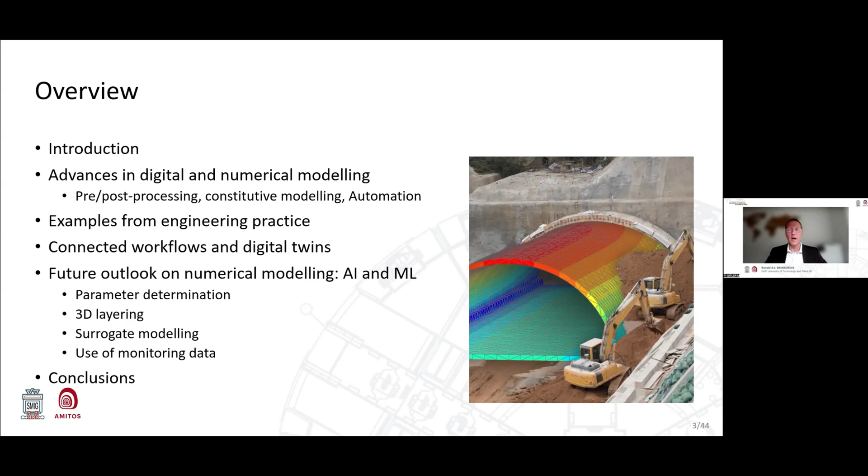In the Netherlands, much research related to the practical construction of bored tunnels in soft soils has been performed in the 90s of the previous century. As a result, the first TBM tunnel in the Netherlands, the second Heinenoord tunnel, opened in 1999. Since then, more than 10 bored tunnels were constructed. The most recent TBM tunnel is the Corbulo tunnel in the Rijnland route near Leiden, which opened last year. For all these tunnels, numerical modeling has been performed as part of the design process.

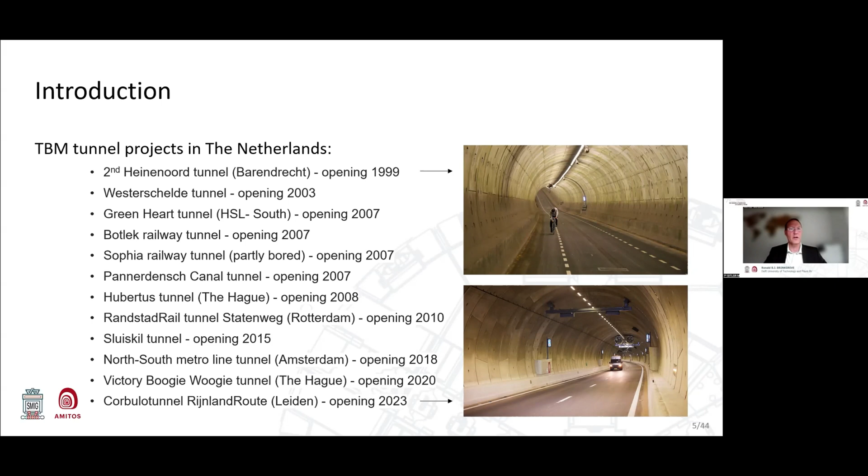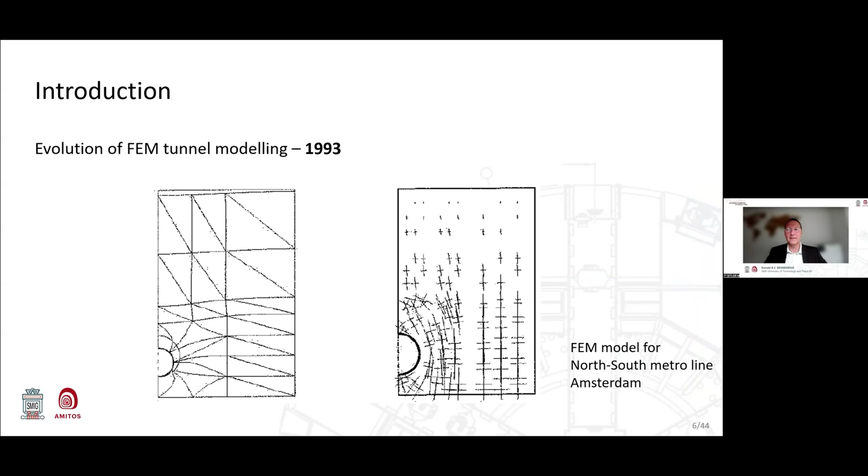In preparation of this presentation, I dived into the history of numerical modeling of tunnels and shafts in practical applications and found this example from 1993. The picture shows a finite element model for the construction of the TBM tunnel for the North-South Metro line in Amsterdam. This involves a 2D plane strain finite element model composed of a limited number of 15-node triangular elements. The volume loss due to TBM tunneling was simulated using contraction of the tunnel lining, as Angelo already mentioned. The right-hand plot shows the rotated principal stresses in the ground, indicating arching around the tunnel.

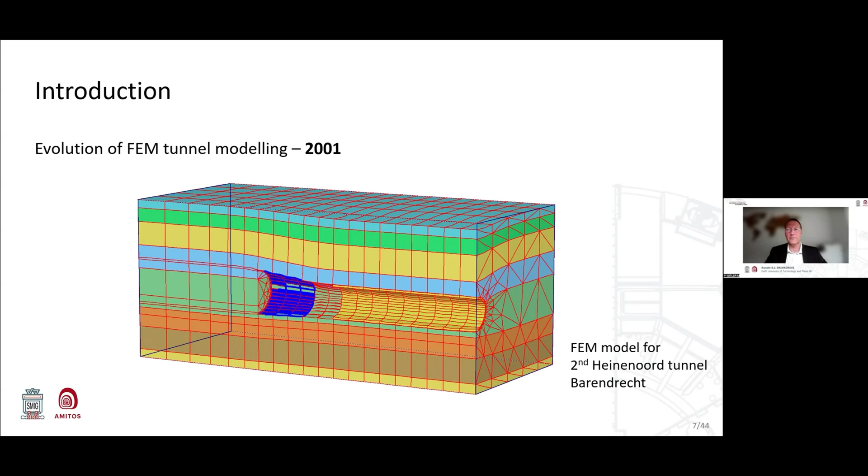8 years later, it was already practically possible to model TBM tunnel construction using a 3D finite element model. The model shown here was created for back analysis of the second Heinenoord tunnel near Barendrecht. The deformation around the tunnel was modeled using a combination of 3D lining contraction and grout pressure modeling, followed by the installation of the final tunnel lining. You can see how a settlement trough is formed and how every advancement step contributes to the surface settlements.

Fast forward to 2017, when 3D finite element modeling of tunnels and shafts and the interaction with surrounding structures in an urban environment has become quite feasible and common practice. The model shows a tunnel with reinforcements constructed according to the sequential excavation method and its influence on the surrounding structure.

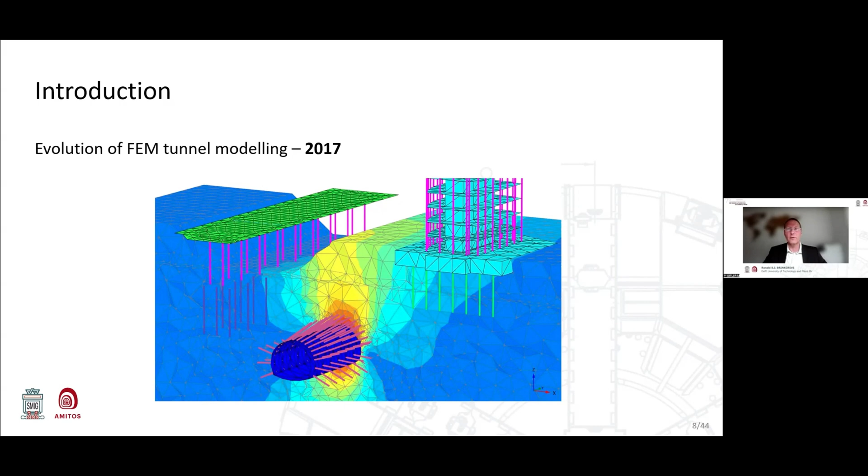BIM was introduced, offering new capabilities for integrated digital workflows. Now, in 2024, the new paradigm is digital twins. A digital twin is a digital copy of a project or asset, such as a tunnel or any kind of infrastructure. It makes all related information securely available for all stakeholders involved.

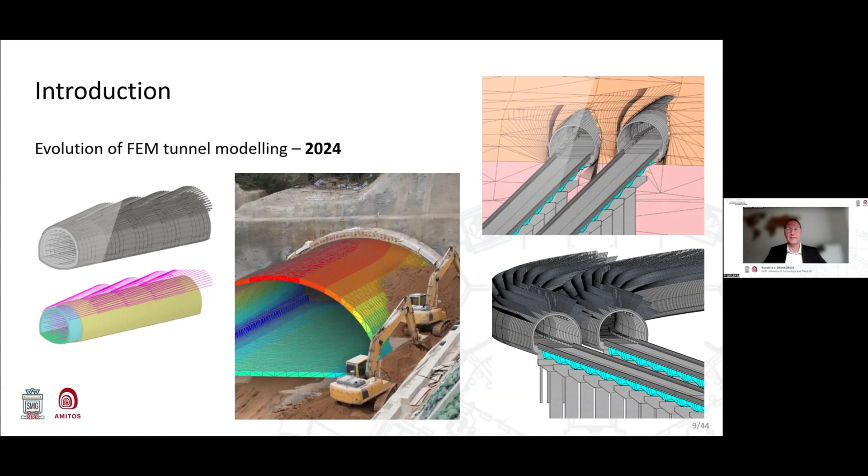A digital twin does not only cover the entire construction process, from preliminary design to project delivery, it also facilitates operation, maintenance, and retrofit all the way until the end of lifetime. 3D numerical modeling and finite element analysis as part of the design process can be fully integrated in a digital twin environment. Over to some advances in digital and numerical modeling.

Looking at the development of finite element modeling capabilities over the last decades, they can be categorized into geometric modeling, constitutive modeling, structural elements, post-processing, and automation. I will subsequently demonstrate some of these developments, such as a tunnel designer for creating tunnel geometries, constitutive models for soil, rock, and shotcrete, special elements for anchors, rock bolts, forepoles, and cables, and I will mention tools for post-processing and automation. In particular, the programming language Python, with all its available libraries, has proven to be extremely useful in automation.

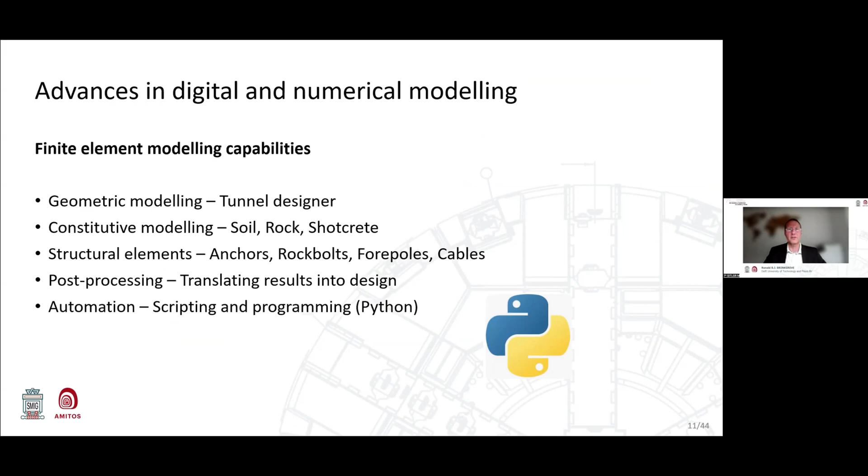The import of CAD models of tunnel contours for numerical analysis is often problematic, since CAD models may provide inconsistent geometries. The use of a tunnel designer in the finite element software is not only useful to create a consistent tunnel geometry, it also facilitates the generation of structural components as well as the installation phases. In this way, a consistent numerical model can be created that allows for a realistic simulation of the tunnel construction process, both for TBM type of tunnels as well as for tunnels following the sequential excavation.

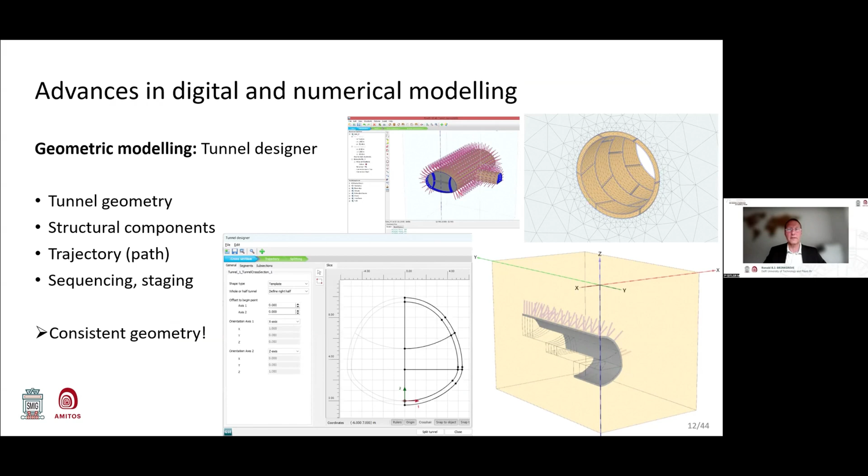Significant advances have also been achieved in terms of constitutive models for soils and rocks. Besides the well-known modified Cam-clay model and hardening soil model with small strain stiffness, more advanced models are nowadays available that incorporate specific features of soil and rock behavior. Such features may include anisotropy, strain softening, unsaturated soil behavior, swelling, and creep. Note that strain softening behavior requires the use of a so-called regularization technique to reduce the inherent mesh dependency that would otherwise make the results unreliable.

A special rock modeling feature is a discrete fracture network generator. This is not a constitutive model, but a tool to generate discontinuity elements with a separate failure criterion in the finite element mesh based on a stochastic distribution of fracture orientation and sizes. One of my TU Delft students, Vasilios Scordilis, created his own 2D DFN generator and investigated different failure criteria for discontinuity elements.

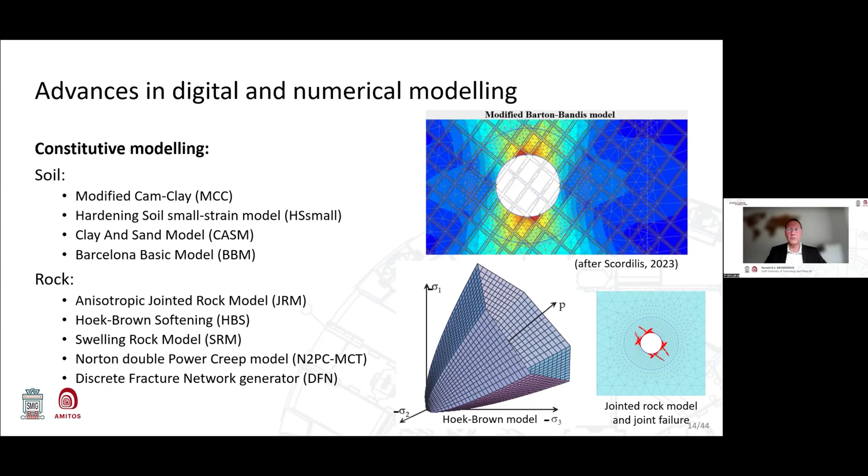Unfortunately, there is no time to go into the details of all these models, but more information is available in the various publications from researchers in our group. Some references are given at the end of this presentation.

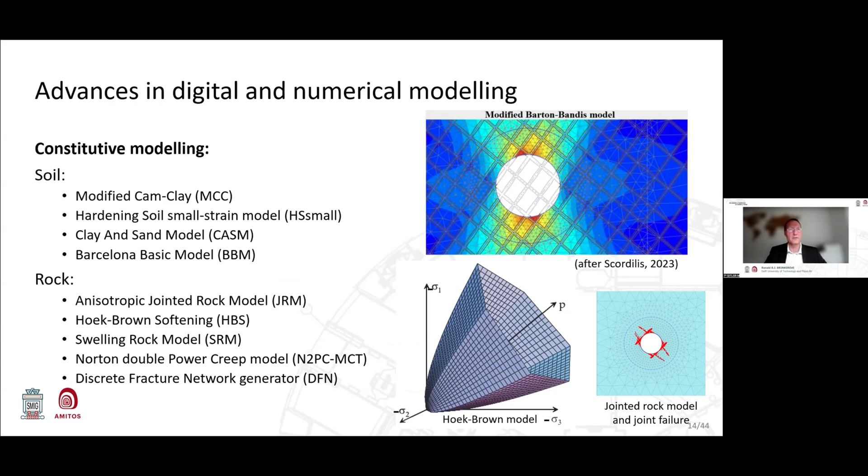A special constitutive model has been developed for shotcrete. This model deals with the hardening of the fresh shotcrete on the short term, as well as the nonlinear stiffness and strength properties in compression and tension on the longer term, including strain softening and creep. The use of such an advanced model may be beneficial in the design process. Its nonlinearity will generally result in lower stress concentrations, and as a result, less reinforcement is needed in the design of a tunnel lining than what would otherwise be needed when using a simpler model.

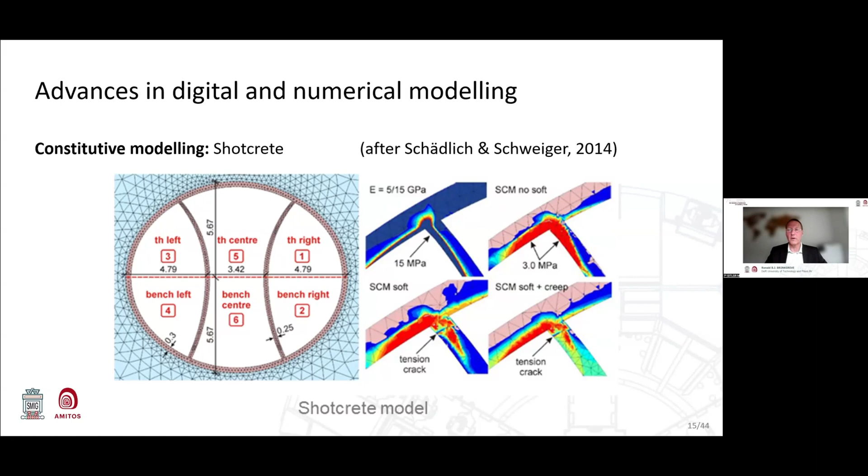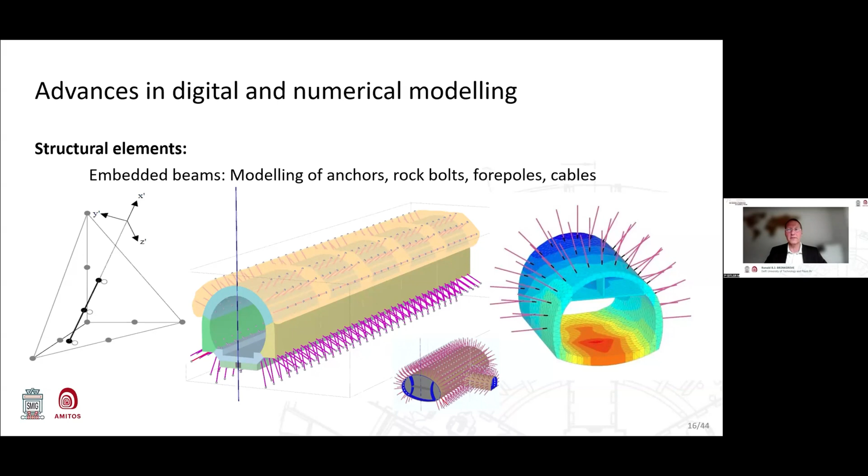Structural elements have been developed to account for various types of anchors, rock bolts, forepoles, and cables in the numerical model. These elements make use of the embedded beam concept, where a line element can arbitrarily cross a continuum element representing the surrounding soil or rock. Apart from its structural properties, the line element also incorporates a special type of interface that accounts for a realistic interaction and bonding with the surrounding soil or rock. These structural elements can be conveniently and consistently incorporated in the numerical model via the tunnel designer.

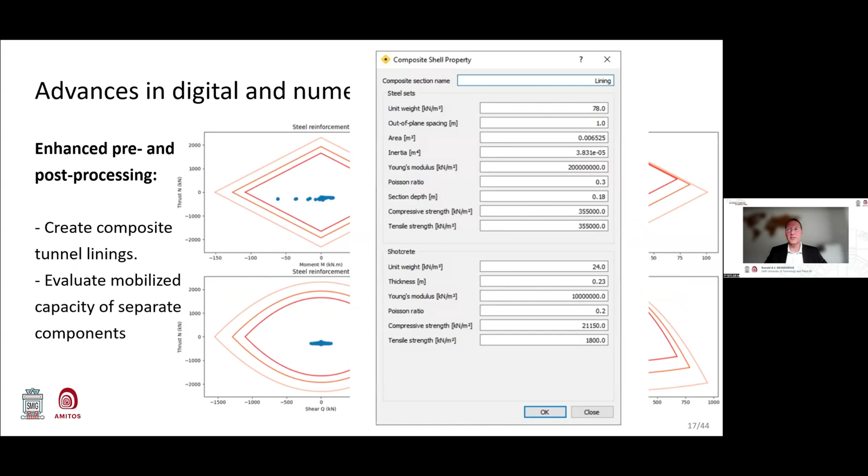Shotcrete tunnel linings are generally reinforced by steel bars or meshes. The combination of both is typically modeled as a composite shell in a finite element model. The equivalent shell properties can be calculated with help of a pre-processing tool, while the mobilized capacity of the separate components can be assessed using an enhanced post-processing tool. The resulting picture shows where the actual combination of structural forces of the shotcrete and the steel reinforcement lies within the corresponding capacity diagrams.

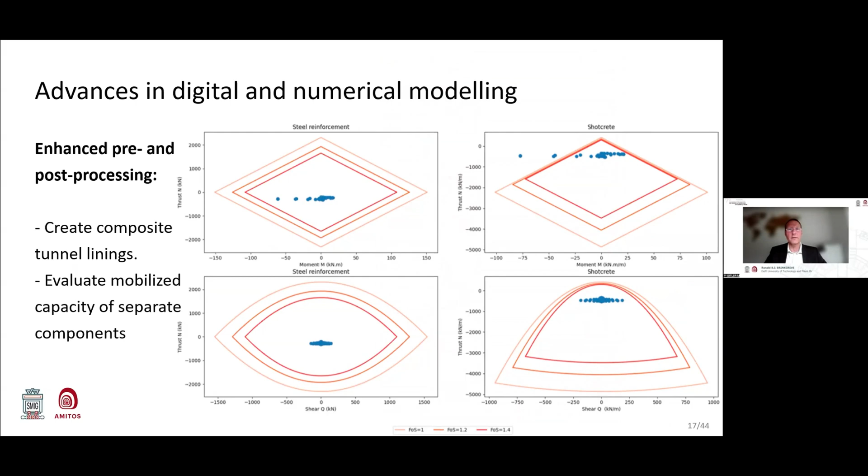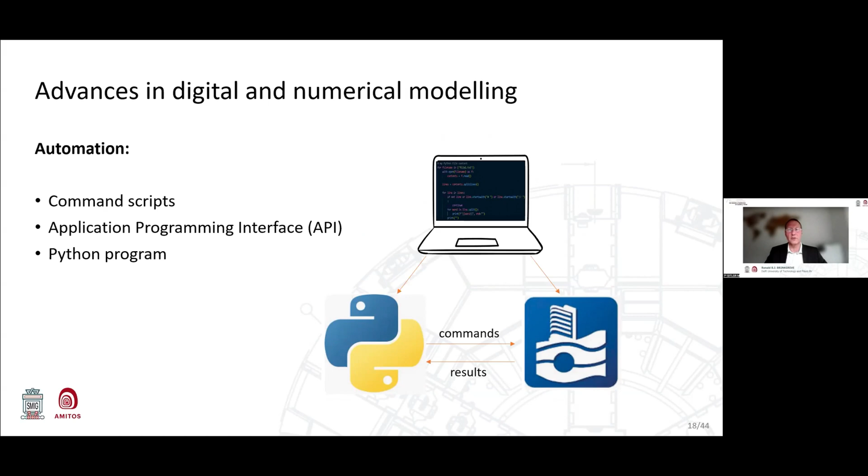Automation helps make the numerical modeling process efficient and less error-prone. Modern finite element software works with a command line interface that allows predefined command scripts to be executed. The executed commands are logged, and the logs can serve for quality control purposes. An application programming interface, or API, allows external software to interact with the numerical model. An external Python program can be written to send commands and extract results, thereby controlling the entire modeling and calculation process.

The API does not only make the model creation more efficient, it also provides numerous possibilities for automated processes that would otherwise cost an immense amount of handling time from the user. Examples of such automated processes are parametric studies, sensitivity analysis, design optimization, probabilistic analysis, and the modeling of heterogeneity by means of random fields.

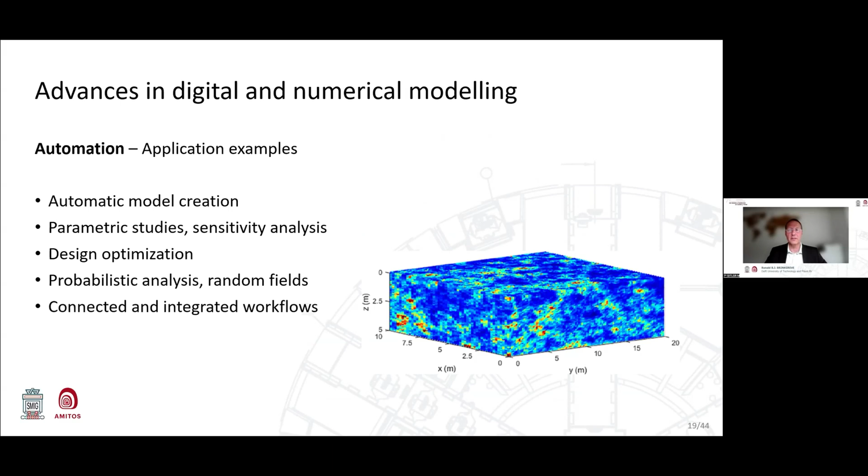And last but not least, it allows for connected and integrated workflows and the exchange of data within a digital environment, such as in BIM and digital twins. I will come back on this in a few moments.

Now I will show two examples from engineering practice where numerical modeling is used to facilitate and optimize the tunnel design and construction process. The first example is a 3D back analysis of in-situ measurements for the South Toulon Tunnel in France. The full-face excavation involves various types of reinforcement to ensure the tunnel stability in the difficult heterogeneous ground conditions. The reinforcement strategy was adapted and optimized based on the measurement data.

The measurements were also used to validate the numerical back analysis model, which was used to gain more insight in the complex soil structure interaction behavior around the tunnel and its reinforcements. The graphs show the 3D settlement profile in longitudinal direction and in a cross-section in comparison with the measurements.

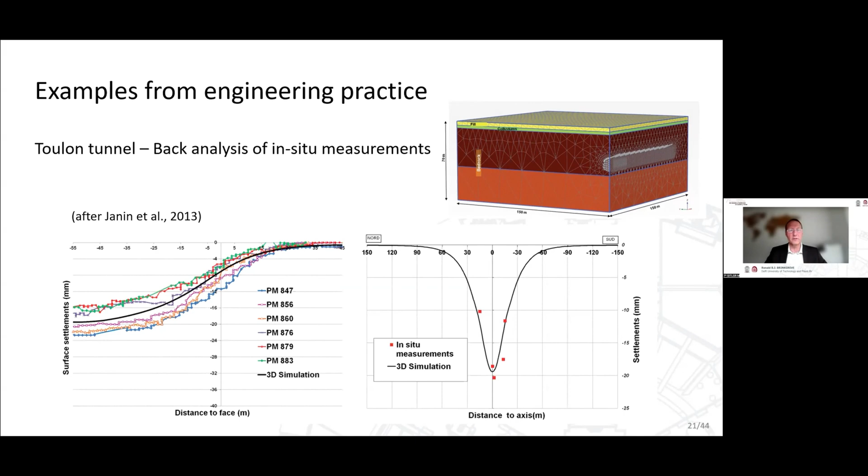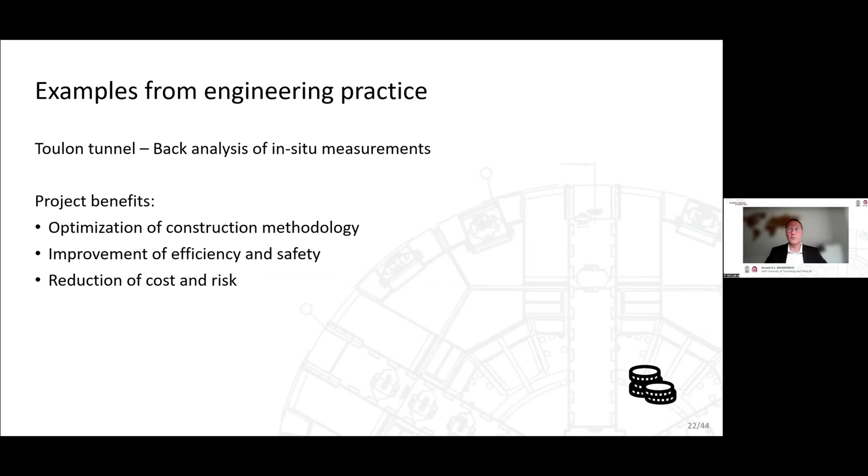The numerical back analysis provided the following benefits to the project. It led to an optimization of the construction methodology, in particular with respect to the placement of reinforcement elements. It gave an improvement of the efficiency of the project, as well as the stability and safety during construction. Overall, it led to a reduction of project costs and risk.

The second example is the automated analysis of a segmented precast concrete tunnel lining, or PCTL, using Python scripting. As can be seen from the pictures, not only the geometry of a PCTL tunnel is difficult to create in a finite element model, also the interaction properties between the lining sections require special attention. Manual model creation would lead to a tedious and error-prone process.

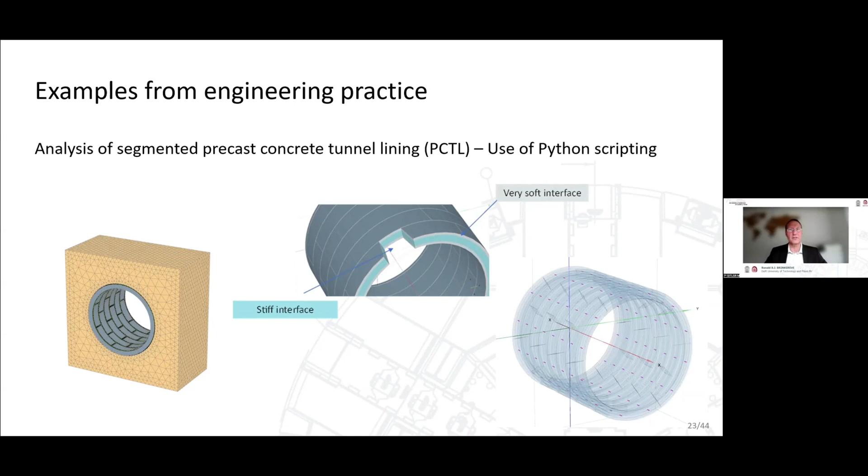A generalized and parameterized Python script was developed for the modeling of PCTL tunnel linings in the engineering practice. The script can be used to automatically create or generate tunnel geometries, segment interactions, loading conditions, and construction sequences for numerical analysis.

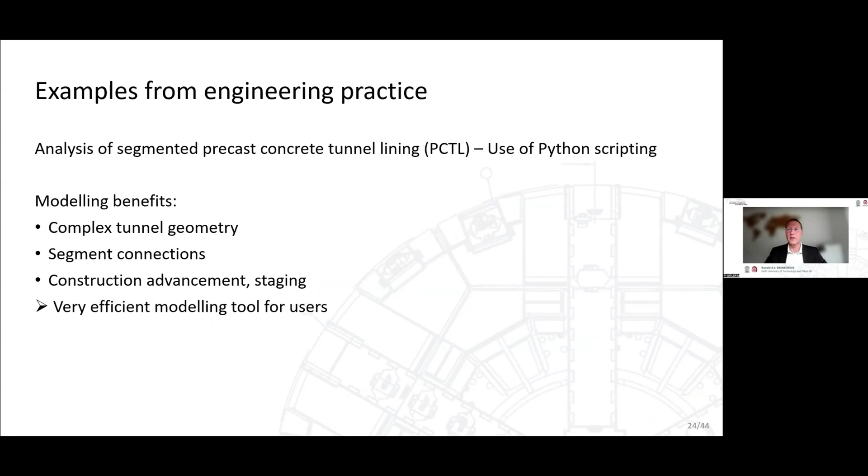The benefits of the Python script are multiple. It automatically generates complex tunnel geometries. It deals with the complex segment connections and their interaction properties without introducing modeling errors. It also handles the tunnel advancement and translates this into construction stages or calculation phases. Overall, it is a very efficient modeling tool for PCTL tunnels available for practical users.

As promised, I will now take a moment to talk about connected workflows and digital twins. Data plays an important role in any project. Connected workflows and digital twins are centered around data, typically stored in the cloud. A digital twin exists by the interoperability and exchange of data between different software packages. It is essential that the data is kept up to date as a single source of truth, such that all processes and results depending on these data are also kept up to date.

Within a digital twin, geotechnical and geological data can be interpreted and processed into soil and rock strata and parameters. These data can be passed onto geological modeling software to create a 3D subsurface model. Sections from the subsurface model, together with structural data and components, can be further processed to create geotechnical and structural analysis models for performing design calculations. Results from these calculations can also be stored in the system.

Moreover, sensor data and real-time observations stored in the system can be used for monitoring, back analysis, and optimization. All up-to-date information is presented in a structured and meaningful way for project management and decision-making purposes, and securely made available for any stakeholder in the project.

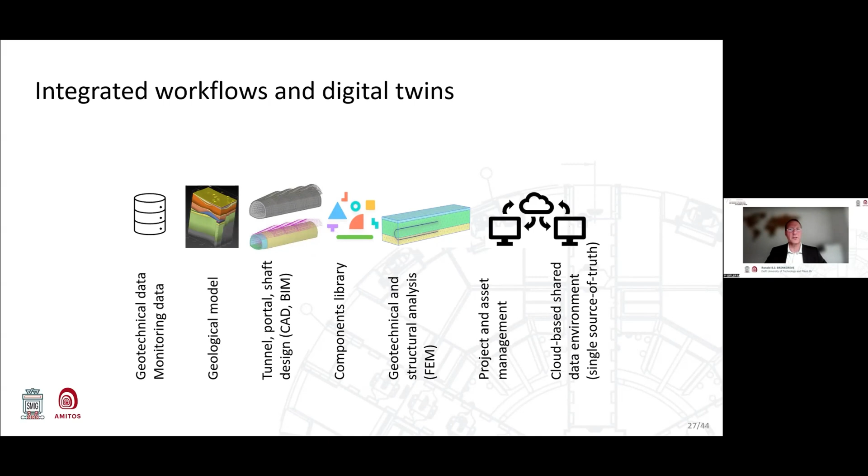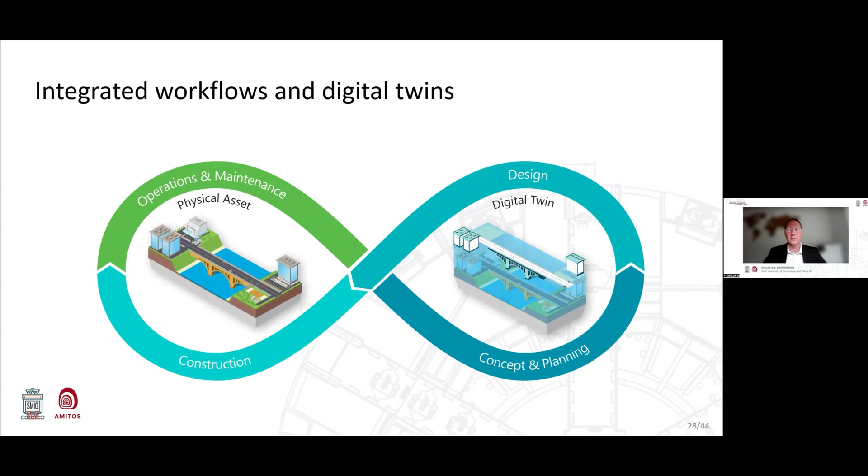As mentioned, a digital twin does not only cover the design and construction process, it also captures the continuously evolving state of a project from its concept and planning to design and construction, and following digital modeling and automation, it's clear that integrated twins are ready for the next step in tunneling and infrastructure projects. Now it is up to the industry to adopt digital twins and benefit from the connected workflow and instantly available project data, not only in new projects, but also for existing tunnels and other infrastructure.

The remaining part of my presentation gives an outlook on the numerical modeling of tunnels and shafts in a data-driven environment in which artificial intelligence and machine learning will play a major role. As mentioned, data and up-to-date information is essential in any project.

For tunneling projects, this may involve geometric and location data, ground data, structural data, materials and properties, including soil, rock, structural properties, measurement data from sensors and observations, elaborated data resulting from the interpretation of raw data and from the design process.

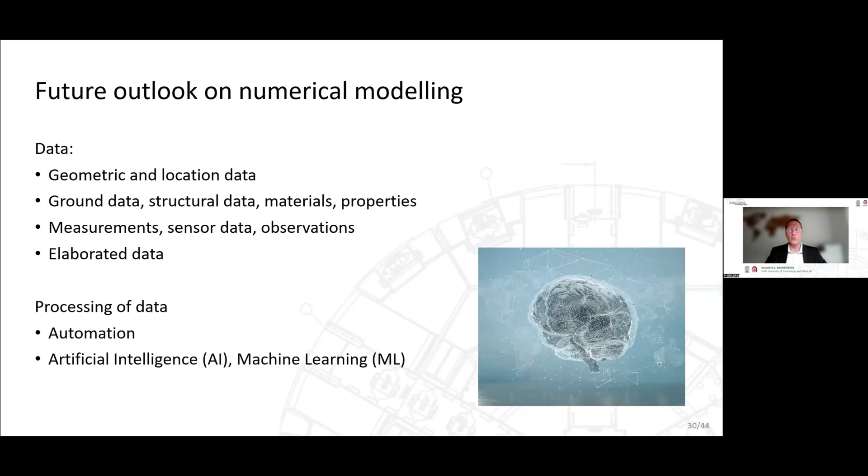The numerical modeling of tunnels and shafts needs such data and may benefit from a further enhancement of these data. Automation, as well as artificial intelligence and machine learning, may help to efficiently process these data and facilitate numerical modeling. In the following slides, I will demonstrate some concrete examples using AI and ML in numerical modeling.

A first example where AI and ML can help numerical modeling is in parameter determination. We have developed a method for automated parameter determination, or APD, from cone penetration tests and other field tests in soil based on the graph method. The graph method is a form of artificial intelligence. It is used to create paths of correlations all the way from the core CPT parameters via intermediate soil properties to the final soil and model parameters.

To determine all model parameters of the hardening soil small strain model requires a more extensive graph, but in principle, the whole parameter determination process is still transparent and verifiable. Users can follow how parameter values propagate through the system. Alternatively, an artificial neural network could be trained on the input and output parameters to provide model parameters for other cases. However, in this way, the parameter determination process is not transparent anymore and becomes a black box.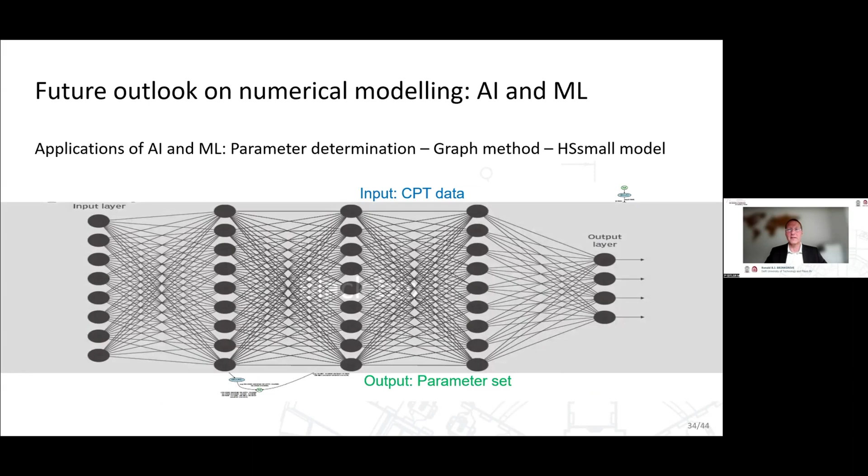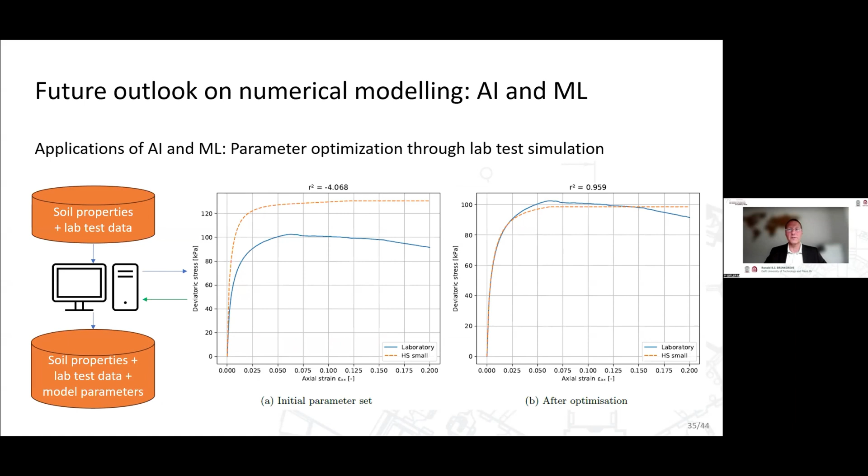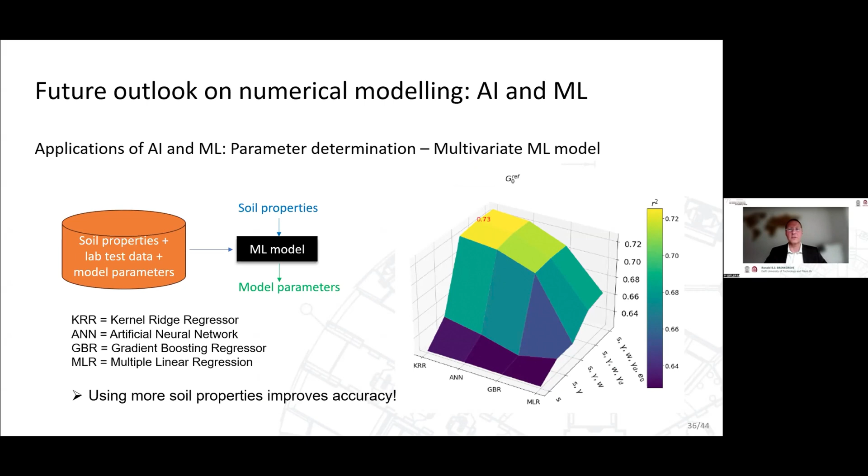In this way, the existing database was extended with optimized model parameters for the hardening soil small strain. He then used the extended database to see if a machine learning regression model could be trained to predict the model parameters directly from the basic soil properties. The diagram shows that using more soil properties improves accuracy, although the results are not perfect. The kernel-ridge regression algorithm gives the best results in this case. Together with the automated parameter determination from field test data, as mentioned earlier, this could help overcome the lack of lab test data that is usual in an early stage of a project.

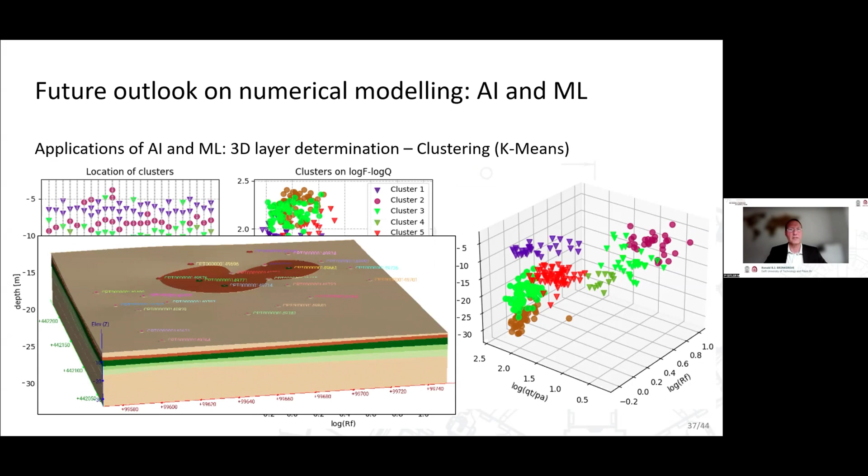The third example of machine learning is surrogate modeling. A surrogate model is a data-driven model rather than physics-based that can provide instant results for a situation that can be described by a set of input parameters. A multivariate machine learning classification or regression model is trained on specific outcomes from different sources, such as field observations, but also more time-consuming numerical analysis can be performed to prepare the training data.

It can replace numerical analysis in case multiple evaluations are required, for example, in parametric studies, design optimization, or probabilistic analysis. So far, surrogate modeling has been applied to relatively simple geotechnical problems, such as bearing capacity of foundations, stability of slopes and embankments, and deformation and forces in soil retaining structures, with variations in soil properties, geometry, and load configurations.

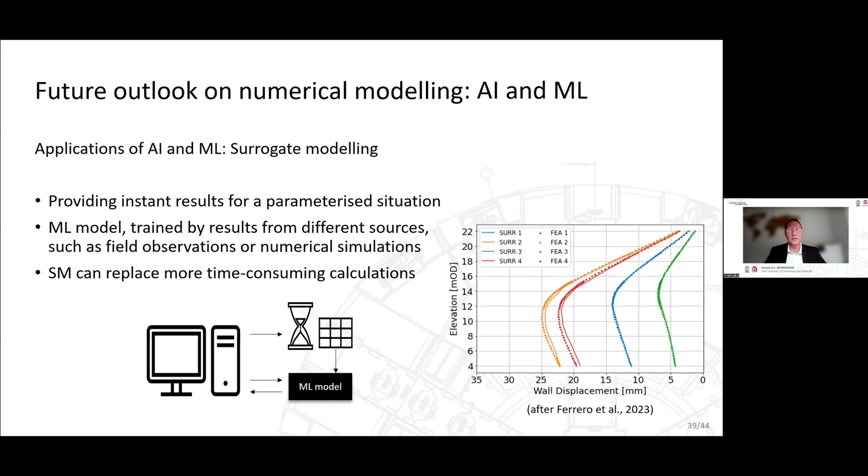The last example where AI and machine learning can be used is in conjunction with monitoring data, such as obtained from the observational method. AI and ML embedded in a cloud-based digital twin ecosystem can provide great opportunities to integrate the continuous flow of monitoring data with instant modeling capabilities into monitoring dashboards. This also enables the creation of early warning systems and decision support systems, allowing operators to take immediate action in case predefined values are exceeded or undesired scenarios are unfolding.

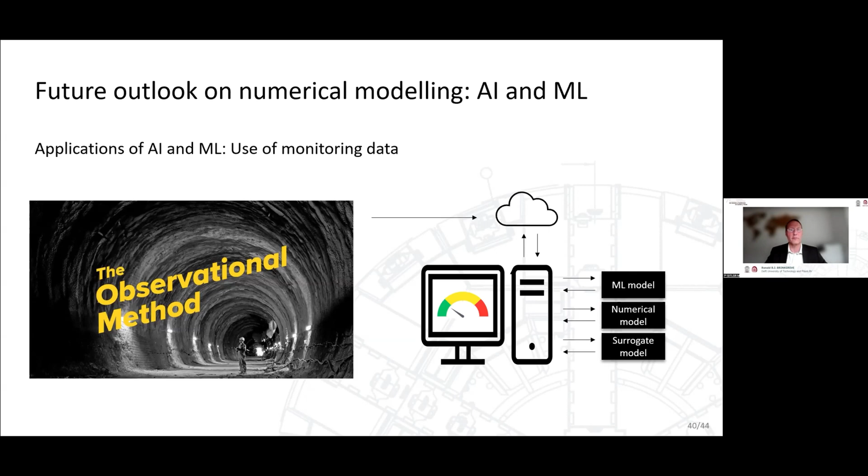That brings me to the conclusions of this presentation. Numerical modeling of tunnels and shafts has significantly advanced over the last decades. I have shown some examples of geometric modeling, constitutive modeling, structural elements, and automation that are available nowadays for efficient model creation and realistic simulation of practical tunneling projects.

We also see that data has and will become more and more important. Numerical modeling integrates with data and other software applications into a cloud-based digital twin environment. A digital twin provides a seamless flow of data across all applications and secured access to a single source of truth for all stakeholders involved in a project.

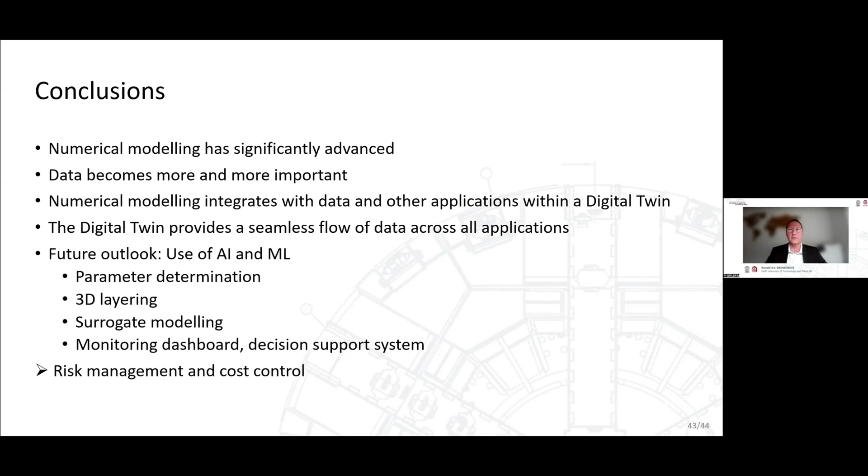In the second part of my presentation, an outlook was given into the future. I have subsequently shown the use of AI and ML in parameter determination, 3D layering, surrogate modeling, and the use of monitoring data. AI and ML provide analysis opportunities that would otherwise be very time-consuming, such as parametric studies, design optimization, probabilistic analysis, and real-time back analysis.

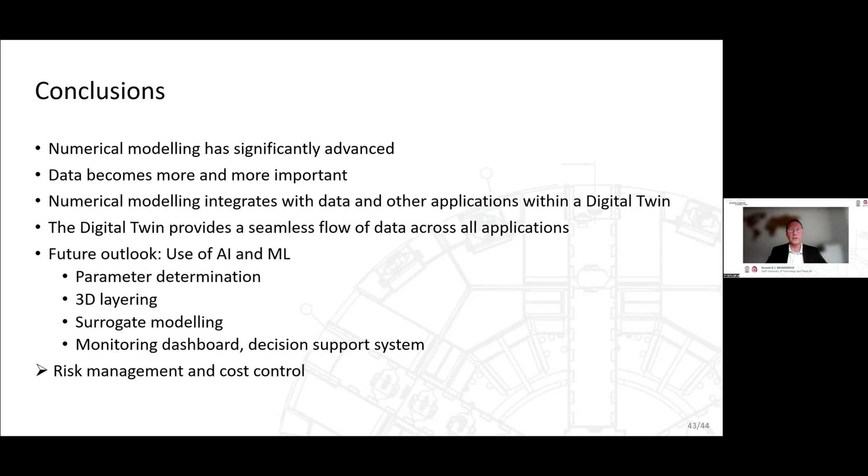It facilitates the creation of monitoring dashboards and decision support systems, which can be of great help in risk management and cost control. The tunneling and infrastructure industry can highly benefit from such developments. I end my presentation with some references.